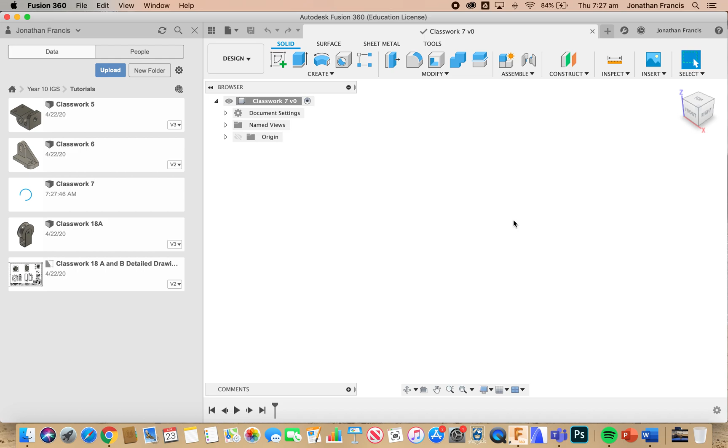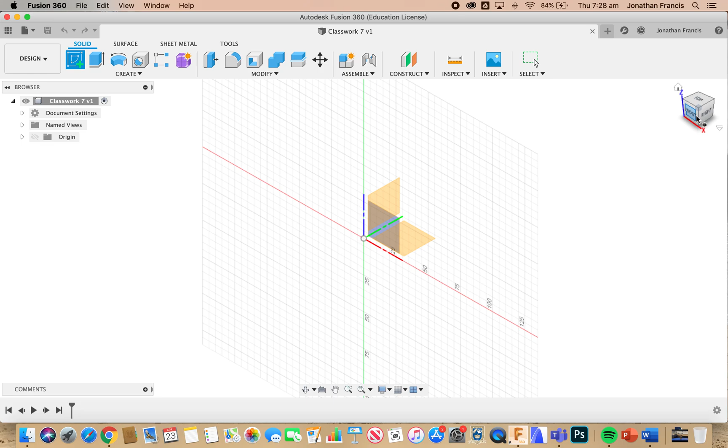Now for this particular item, the steel bracket, I'm going to start modelling from the top. I'm going to select create a sketch, then view on my navigation cube from the top. I'm going to select that plane and start with the cylinder looking portion at the top end there.

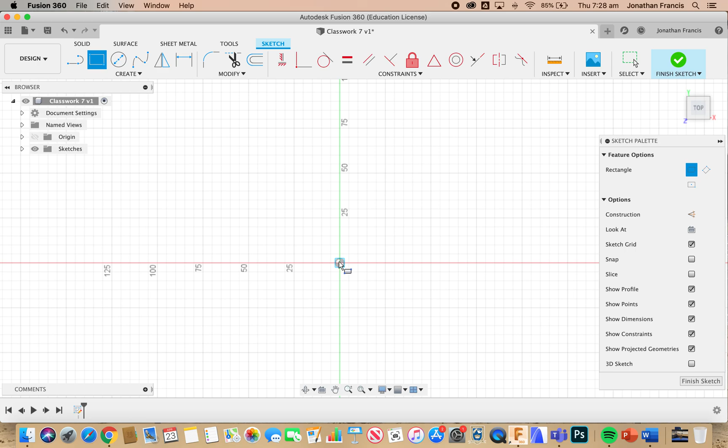I'm going to start with a rectangle, drawing it down here. The front is then at the bottom of my screen, which helps us out a little bit. I'm going to go with 50 deep by 75 wide. This is going to give us the framework we need to do the rounded front as well.

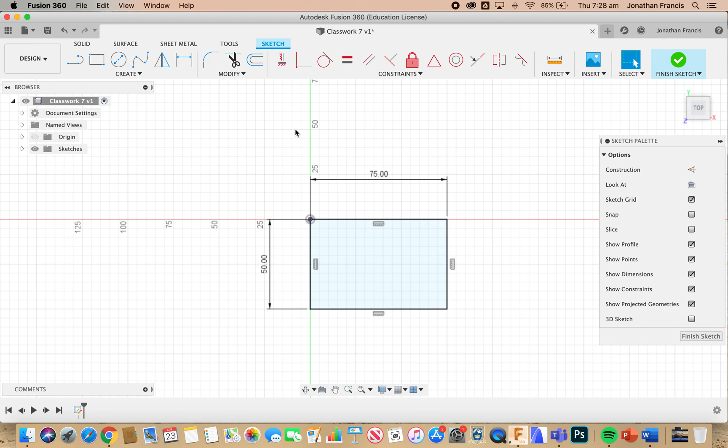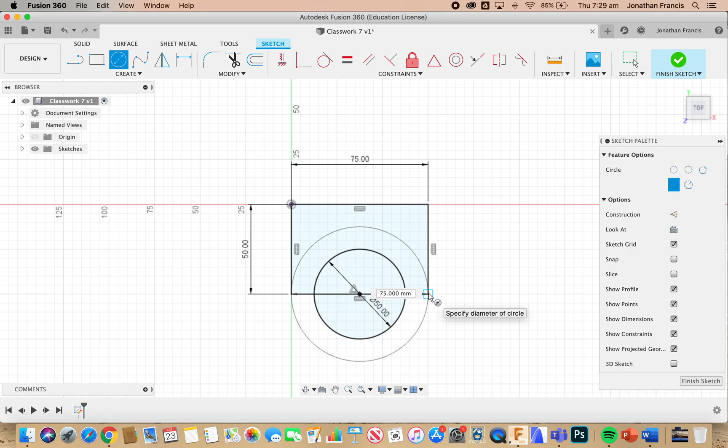Just going to relocate that a little bit. We're going to go up to circle, from the middle here. The first circle is 50. C for circle again, second circle is 75, the same diameter as our rectangle is long.

Now we're going to trim. I'm going to trim out the lines in the middle here, trim the back half of our circle, and the remainder of our rectangle. This gives us the full D looking shape, I suppose.

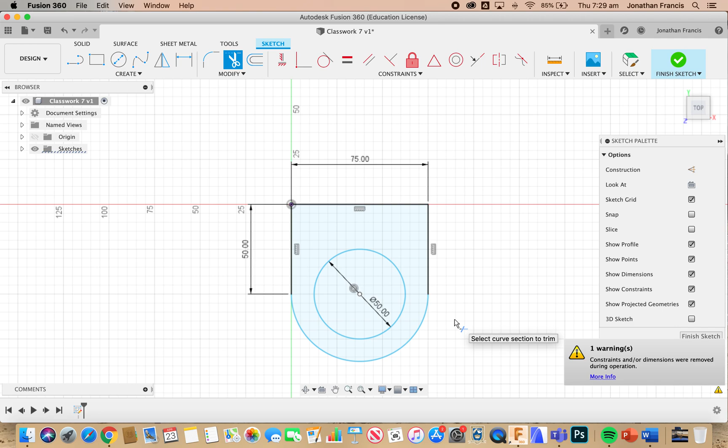I'm then going to finish that sketch and extrude it. I'm going to select that, E for extrude, and drag that up. It tells me off the plan that's 88 millimeters high, so I'm going to go with 88. New body is fine. I'm going to click OK.

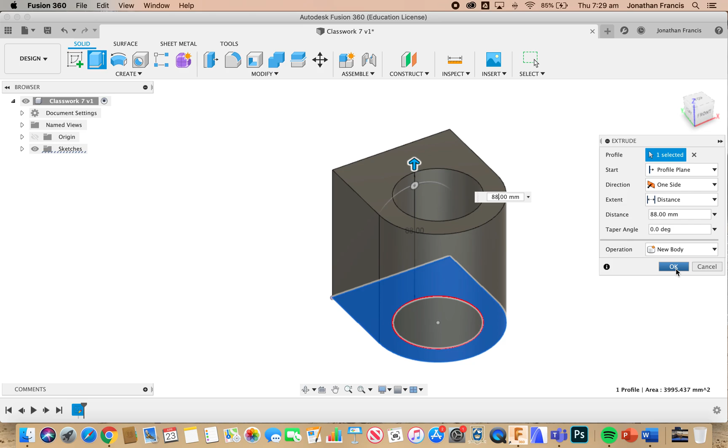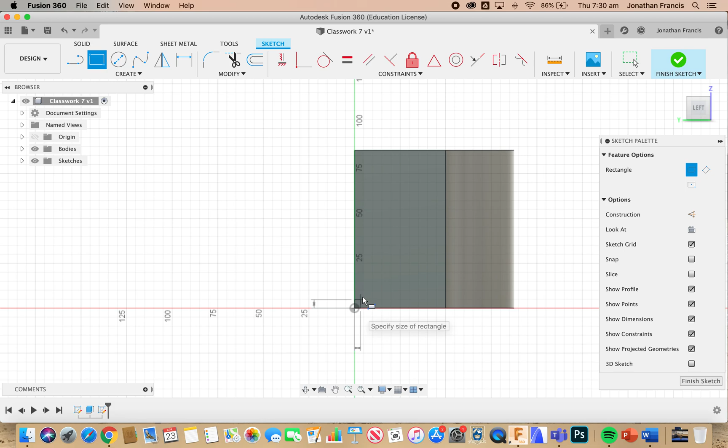From there, I'm going to start modelling from the view of B on the plan. I'm going to grab that side, put a new sketch on there, half a rectangle again. From the back and the bottom, I'm going to come up 40 and in 50.

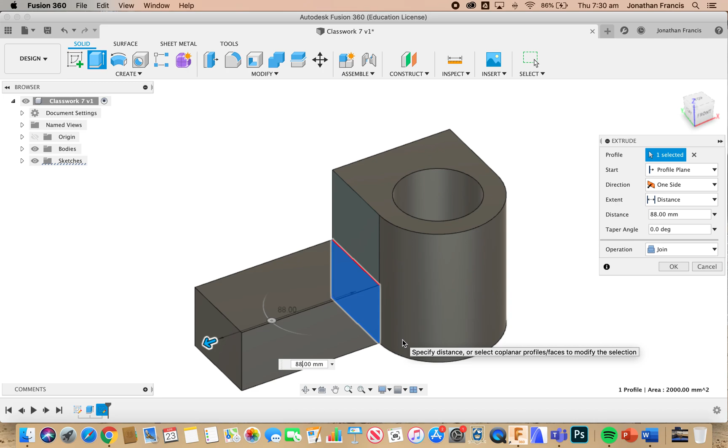Place that there, select it, extrude, and I'll extrude that out by 25, 25, and 38 - so we have 38 plus 50, which gives us 88. We're just going to jump in here, punch in that dimension, 88, and enter. You now have the basis of what we're doing.

There's a few more things to draw. We want our oval shape on the side here, so we're going to throw another sketch on there. Now our sketch, we're going to start with a rectangle from the bottom. We're going up 20 and across 25 to the middle of our first circle.

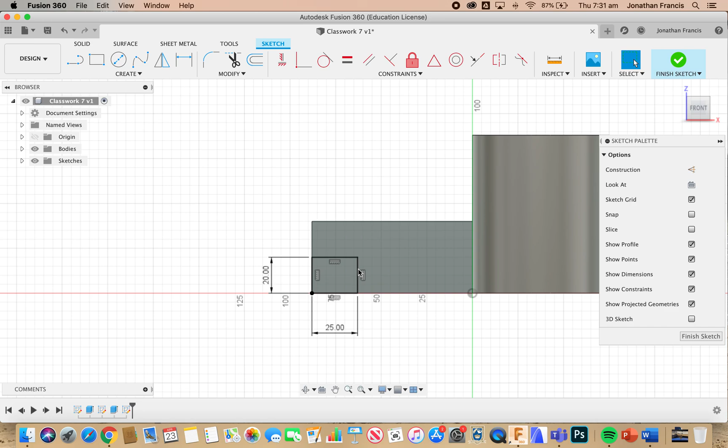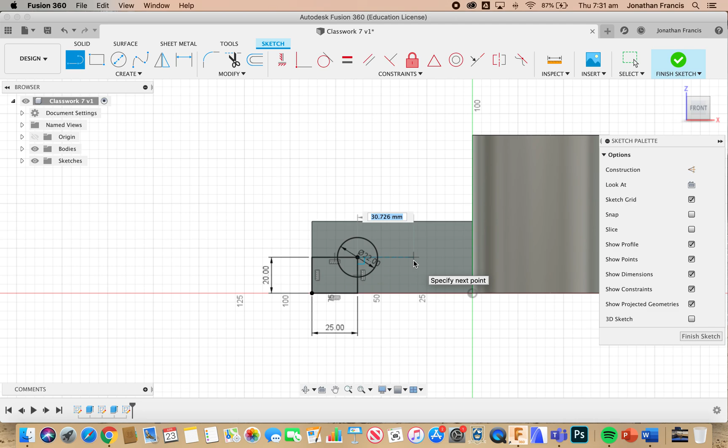We're going to go C for circle. Our circle is, let's just have a look on our plan, 22 in diameter. In between our circles is 44 - so I'm going to go with the line from center point, 44, pop that in there. Second circle, 22, there's our circles done. Actually this is not 44, it's 38.

Better make sure we get that dimension right. That looks a little more correct. So we should have 25 on either end and 38 between the centers.

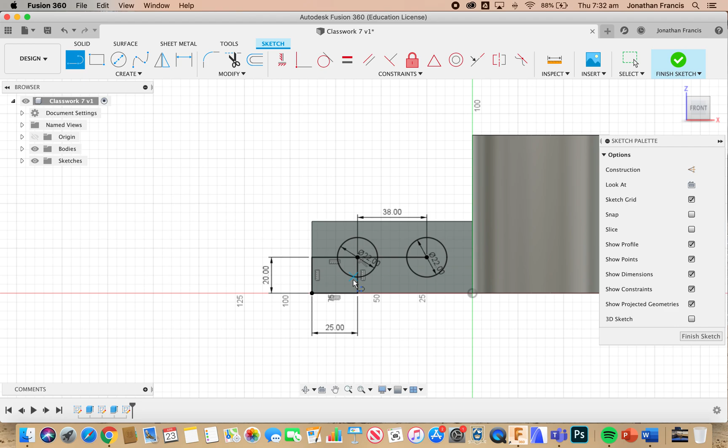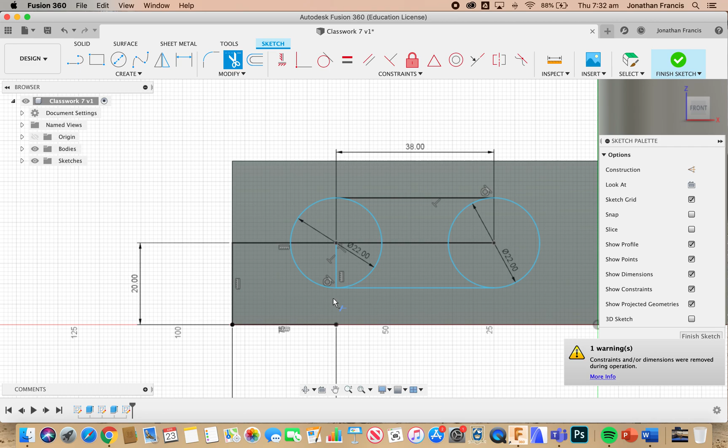Now we're going to add a couple of lines, L for line tool. You're going to go from the top point here to a tangent line, the top point over here. I'm also going to go from the very bottom point to a tangent line straight across this way. We can now trim all our excess - we want to just be left with our oval shape.

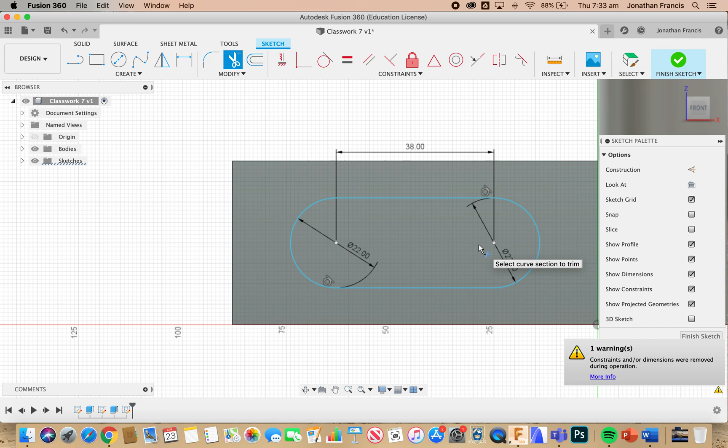Don't be confused by these dimension lines that come out, they're fine to be there. The line is blue, and that's our completed shape. So finish the sketch, select it, E for extrude.

You may want to toggle your view at this point so you can see what's going on, and I want to cut that back through that work plane. So it's going to be a negative number - negative 50 to go all the way through there, and we want to cut. Select OK.

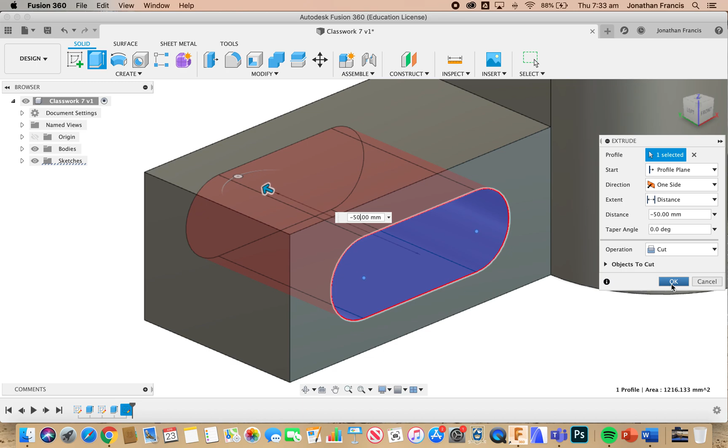Let's just fit that to screen so we can see what's going on. You can now see we've got our large center circle and hole through the top piece here. On this side attached piece, we now have a hole through there as well.

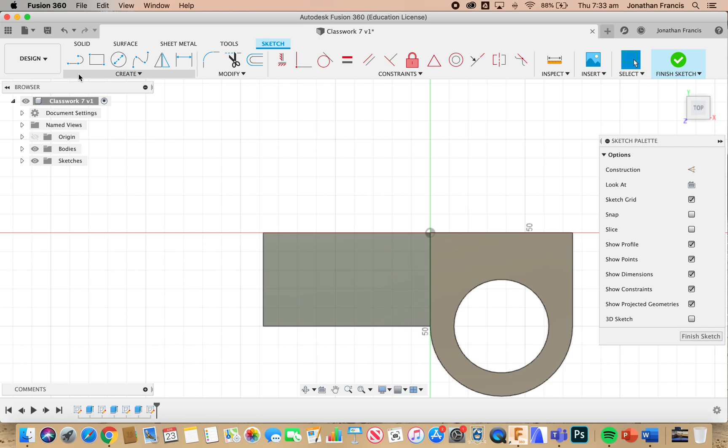Next is our 12mm hole at the top. I'm going to select that plane, sketch on that one. We're going 17 in and 44, so rectangle. 17 in, and tab 44. That's going to give us the center point.

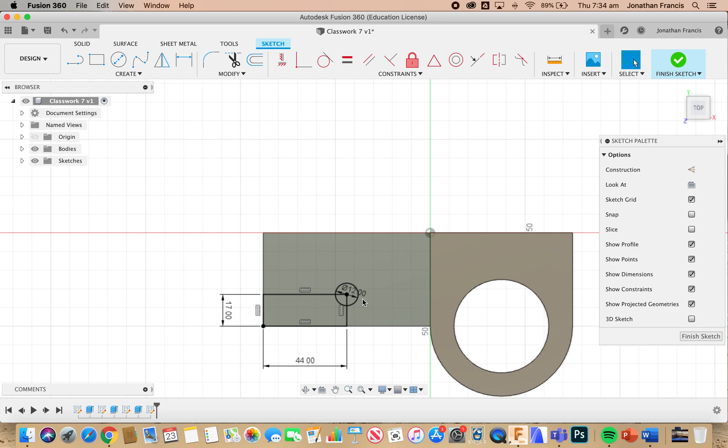C for circle, we go with 12, select enter. T for trim, we can trim off our excess lines here to make it less confusing. Escape or finish the sketch.

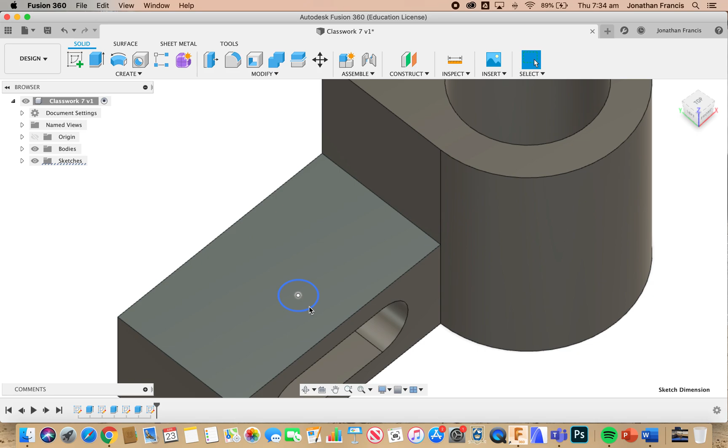Select our circle - we actually want to select our whole circle, and we want to extrude that now through the top, not through the bottom. So we're going to drag that through until we can see it come out in between. Toggle your view so that you can see it there. We want to cut. We're going to select OK.

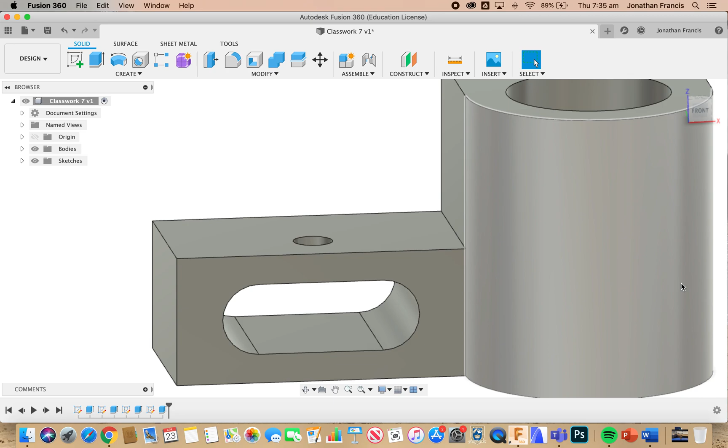We now have a hole. To finish that hole, we need to go to modify, or is it create? I think it's create - Thread. We want to select the surface there. We can see over in our dialog box it's an M12, 1.75mm pitch, and it's a right hand thread.

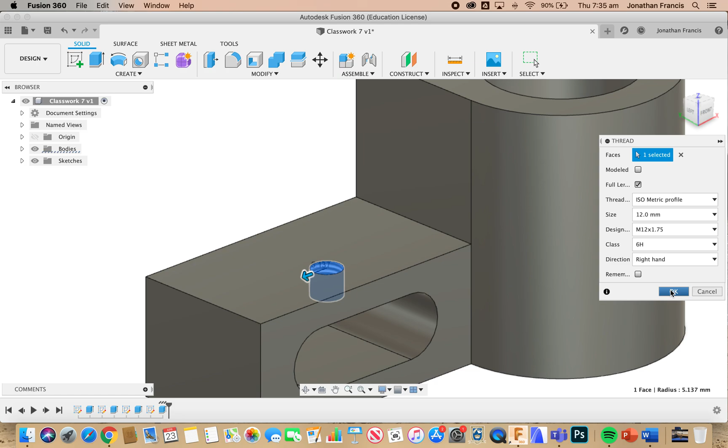It only goes down to the slot, which is what we've got. I'm going to select OK, so we can now see the thread in the bottom there.

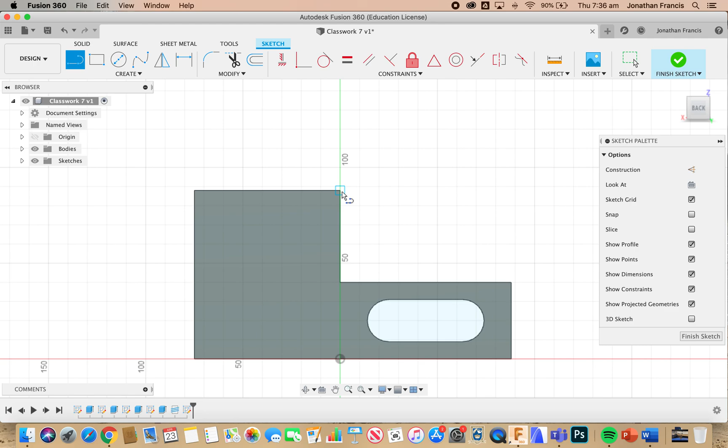Okay, the last thing we need to do for this block is our angled piece coming through the side here. I'm actually going to rotate that around to the back. Select on our back, draw a new sketch, and I'm going to go with the line tool from the top to the bottom. Just the one line, E for extrude.

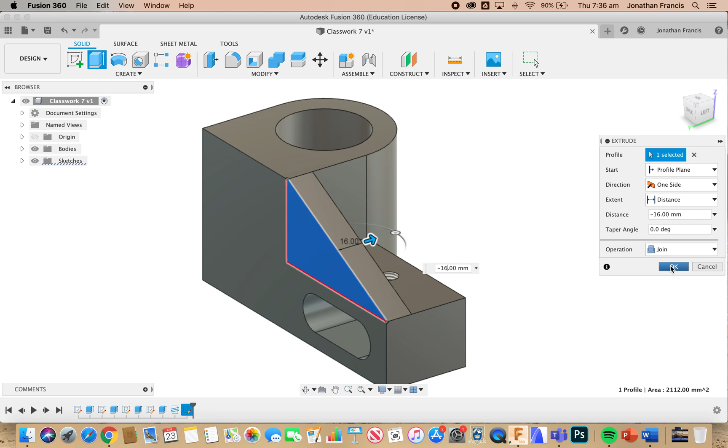I'm going to select the triangle that we've just drawn in, and we're going to drag that below the work plane, so it's going to be a negative number - negative 16, but we are actually adding the material there. So we click OK, and we now have our completed item for Classwork 7.

So set that view just there, fit it to the screen, select save, and OK, and it is complete.